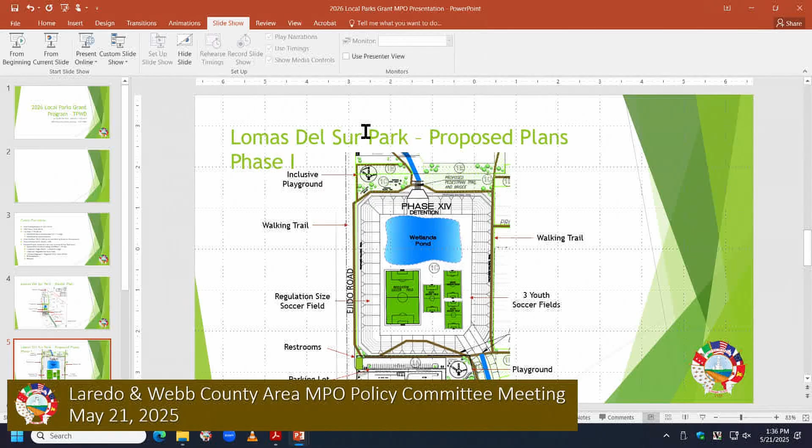This is the whole master plan of what we have now. It does go all the way from Wormser Road to Bianca Road. That's the whole master plan. Phase one does include just the center section. As you can see, there's an inclusive playground at the top, regular playground at the bottom, and 32 parking spaces at the bottom.

It wasn't included in the master plan, but it does include restrooms. Our budget does allow for restrooms.

There's a walking trail all around the pond area, and you can see the regulation soccer field and 3 youth soccer fields. And up here would be the pedestrian bridge.

If I may— yes, go ahead, sir. I'm just curious, you keep referring to phase one, how many phases are there?

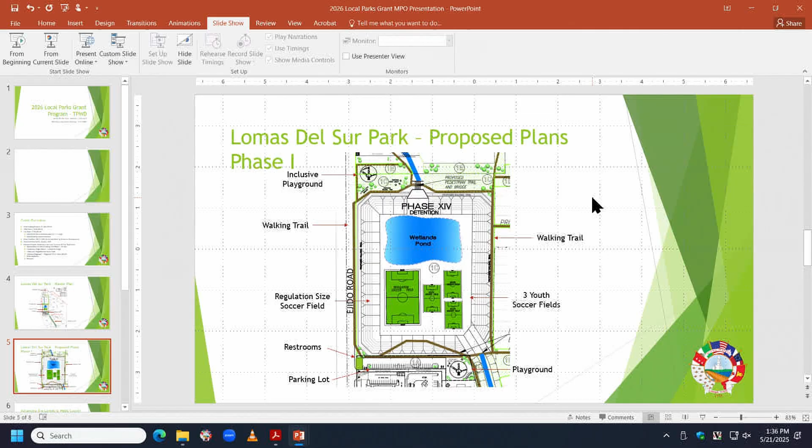So we do plan on breaking it down to 3 phases. The middle portion would be phase one. Phase two would be the top portion all the way to Wormser Road. And the third phase would be from where the parking lot is all the way down to, I want to say, Molina Middle School—I'm not sure the name of the middle school, but there's a middle school down where the trail ends.

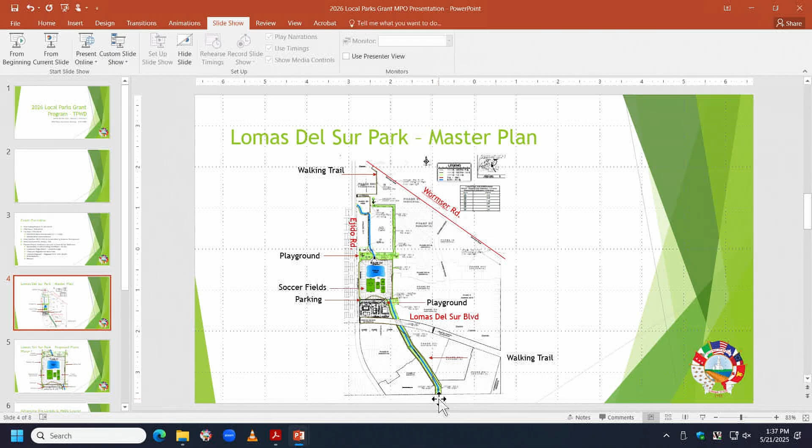So do you have, I guess, and I don't know anything about this, I know this is the city's initiative, but I was just curious what's the total cost? Is it already out there for all 3 phases?

I wouldn't have the cost for phase 2 and 3, but phase 1 did come out to a little bit under 1.5 million, which would be this area right here. Thank you. All right.

And here I just mentioned really quick how the park ties up to the MTP and the active transportation plan. It promotes active transportation, connectivity. It complements the Vision Zero initiative. It supports equitable development, and it supports the regional mobility and land use development.

And here are just the current pictures of what the current area looks like.

So, you said something about 5.5 million, is that correct? 1.5 million. No, but in your initial talking points, did you say something about 5 something? No. Okay, then I misunderstood.

The cost that we have right now is a little bit under 1.5 just for phase 1. I got that part, I don't know why, for some reason I thought you said 5 something, so I was just trying to break it up in my brain for the next phases, that's all. No, it's okay.

And like I said here, pictures of how the current area looks like. And I don't know if y'all have any other questions I can help answer.

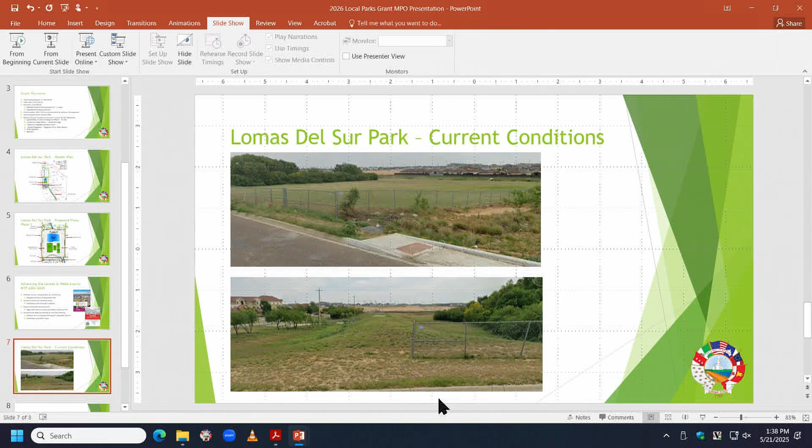Thank you so much, we appreciate it. Any other questions? Ready, Mayor? All right, thank you. I believe the motion passed already. Yeah, motion passed. Thank you.

All right, next, number 5, reports and presentation, no action required. A, status report by the Regional Mobility Authority, RMA.

Good afternoon, Mayor, members of the MPO Policy Committee. Jed Brown with you all. We have in your packet, like you find each month, each item or project that we're working on listed there. We try and provide it in advance. If y'all want to read through it and you have questions, we're always here to answer them.

2 of the bigger projects we're working on would be the Vallecillo project and the Vision Zero Safe Streets for All. Vision Zero has a meeting tomorrow with TxDOT, the RMA, and the City of Laredo to visit about that project. In continuance of it, we have an application due next month for implementation funds. We're hopeful that that particular item will actually be on the City Council agenda June 2nd.

I know that we're all trying to come up with money to fund that initiative, that project, and I was told by Assistant City Manager Ramon Chavez that he and city management will be working with council to try and identify where the money would come from to fund that portion. The RMA is willing to kick in monies, and TxDOT has projects on their list. So within a week or so, we're gonna try and figure out how we're gonna move into the implementation part. But we do need the mayor and council's help to come up with some monies.

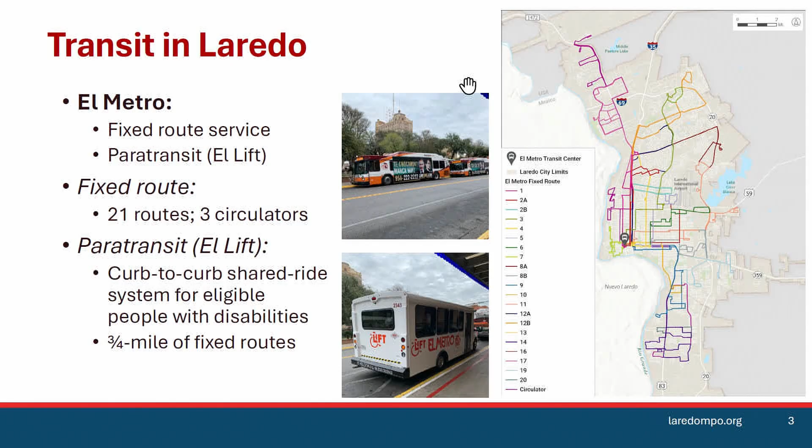Microtransit is a shared on-demand service that operates within defined zones, and that's the key—trips must start and end within a particular area. It's less capital intensive than fixed route, much more simple to change zones or be responsive to rider patterns and requests, and it can allow for increased accessibility and coverage.

Oftentimes it'll provide an improved rider experience because there's the ability to reach more destinations with less waiting time. People can get picked up and dropped off closer than with fixed route. Generally it's technology based, so it works on an app. There's also the ability to have a phone call to schedule rides, and that can be done same day—more flexibility for riders.

The vehicles used for microtransit are often a small bus or a minivan. A portion of these need to be ADA accessible. It differs from Uber or Lyft in that it's a shared service, and the trips must start and end within a particular area.

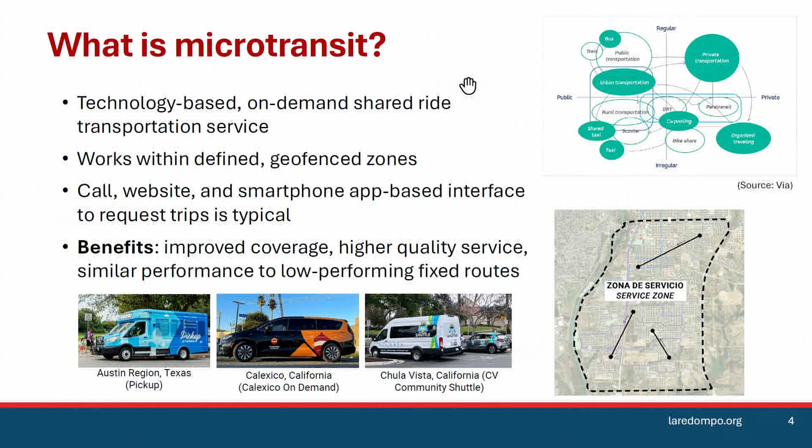One thing I'd also like to note is that we did a review of various planning efforts done in this region over the last few years, and microtransit would help achieve some of these regional goals for mobility and sustainability.

As part of our study, we looked at other agencies currently implementing microtransit. We wanted to understand lessons learned and considerations for implementing microtransit here in Laredo. We picked 7 agencies—4 located in Texas, and 3 of them are also border communities. We conducted phone interviews with these agencies to understand their challenges and lessons learned.

There's really a wide variety in the number of zones they have, the cost, and wait times. Something about these agencies as well is that a lot of them are turnkey operations, meaning there's a third party that runs their whole system. Austin and Tulsa in particular use their own vehicles, but they do have a contractor that helps with the technology side of things.

A lot of these programs started off as pilot programs, and then expanded over a series of years. Some of them started to replace poorly performing fixed routes, so there's definitely lessons and experiences that can be learned from these agencies.

For Laredo, we developed 5 zones. To do so, we looked at the lowest performing fixed routes, which are the 3 circulator routes—C1, C2, C3—as well as route 8B. All of these carry fewer than 6 passengers per hour.

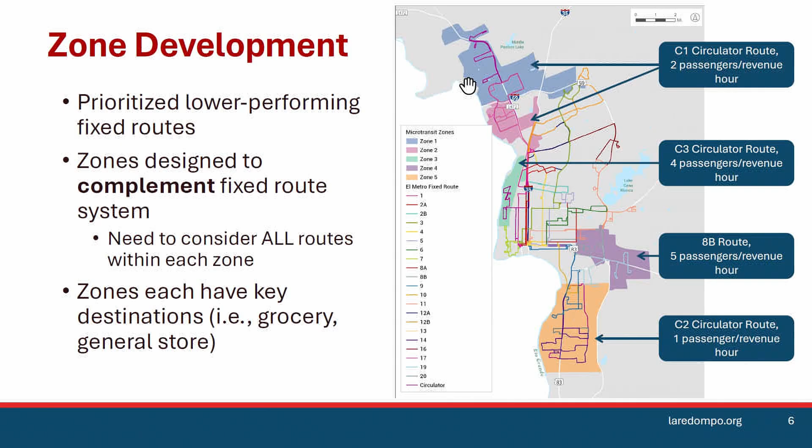Just to talk very briefly about some of these zones—Zones 1 and 2 are located in the northern part of Laredo. These have industrial land uses, which is an interesting use case for microtransit. We spoke with some folks as part of this study to understand how microtransit could help alleviate some tractor-trailer congestion.

We understand that there are drivers who drive around when they're not working to reach essential services and grocery stores, and implementing microtransit in this zone would allow for this use case. This is where the C1 circulator runs, and again, if that is eliminated, there are definitely opportunities for riders to connect into the fixed route system.

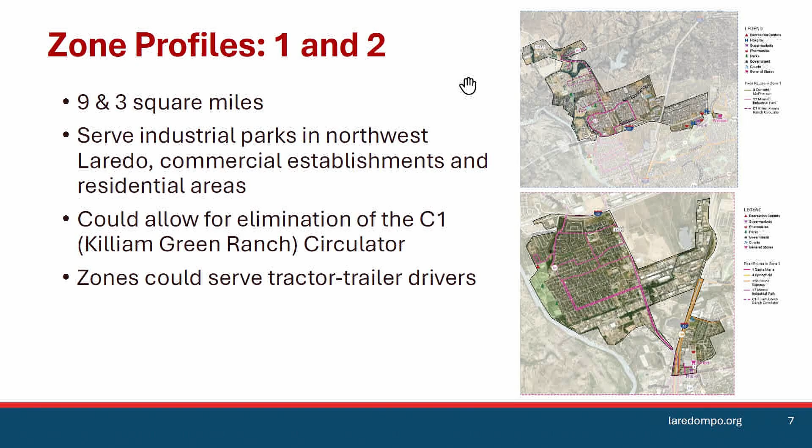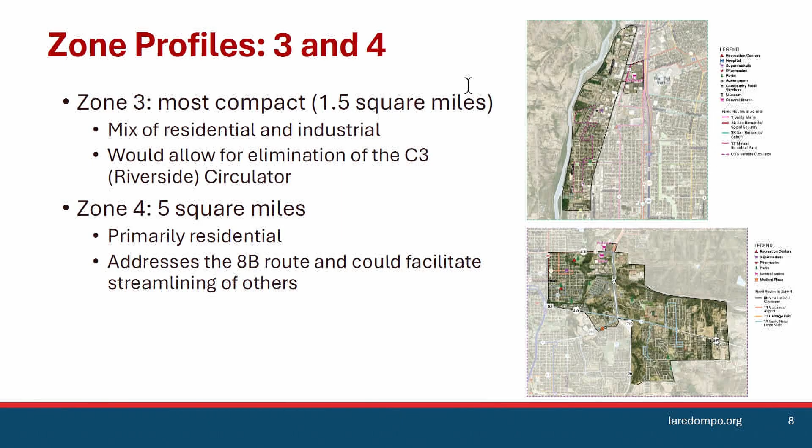Zone 3 is on the west side of Laredo, where the C3 runs. Zone 4 is on the east side, where the 8B runs. Zone 5 is in the southern portion of Laredo. This is our largest zone, and it's where the C2 South Laredo circulator is located.

There are a lot of activity centers and fixed routes already here. Through our engagement efforts, we did hear some interest in microtransit in this area, and that was one of the reasons we considered this zone. However, implementing microtransit here without further data collection or study could have detrimental impacts to the fixed route, so at this time we do not recommend implementing it over here.

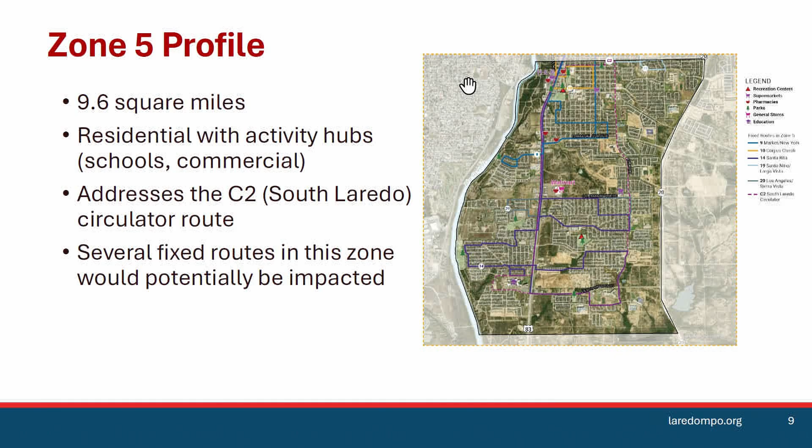For our analysis, we looked at ridership and cost. We looked at internal trips traveling within these zones and tried to figure out how many of those trips would actually be able to use the microtransit. From there, we assume that when you start off the service, ridership is going to be a little lower, and then it will increase as people get more accustomed to the service.

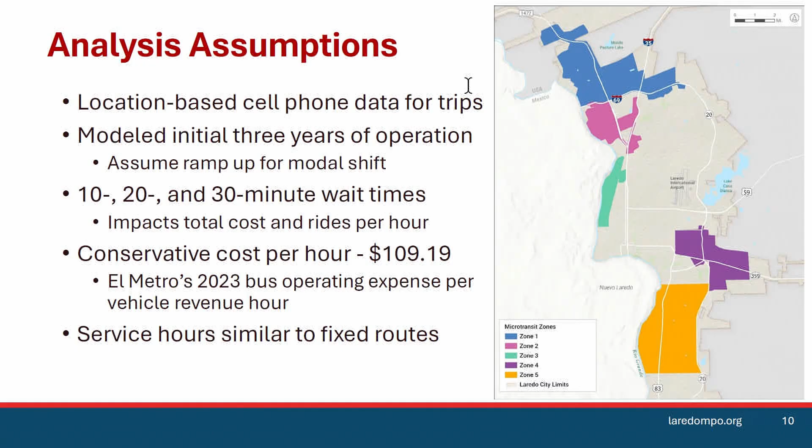We considered a variety of wait times between 10 and 30 minutes. Total ridership per year does not vary based on wait times, but the shorter the wait time, the more it's going to cost, and the fewer riders per hour you will have. The cost estimate used for this analysis is provided by El Metro: $109.19 per revenue hour. Likely microtransit will not cost that much, but that's the number we used.

As part of this study, we spoke to a number of people. We reached out to the public and El Metro riders. We had a survey published last fall, distributed by us and El Metro in person, advertised on social media, and available on the buses and at the transit center. We received 130 responses to our 14-question survey, which asked about people's interest in microtransit, where they'd like to see it, what they'd use it for, and any concerns and thoughts they might have. We also asked for general feedback on El Metro service, and the full survey results are published in the report.

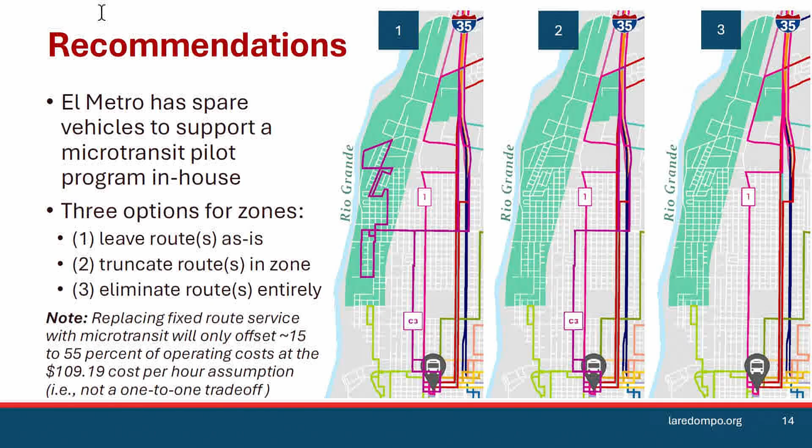A note about cost: microtransit will only offset a portion of the cost. It's not a one-to-one savings.

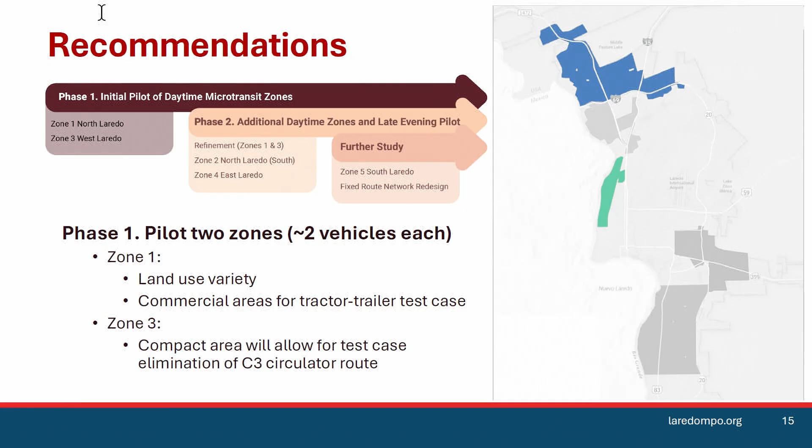Our recommendation is to do a two-phased approach. For the first phase, we recommend piloting 2 zones: Zone 1 in North Laredo and Zone 3 on the west side. Zone 1 would allow for a test case of the commercial drivers, though parking and marketing would need to be sorted out. Zone 3 is the most compact, and would be the easiest to cleanly eliminate a circulator route.

For the second phase, we would recommend looking at what's worked well in the pilot and what tweaks need to be made to those 2 zones, or what other lessons have been learned. The next 2 zones we would recommend are Zone 2, also in North Laredo, and Zone 4 in East Laredo. You could also consider piloting late evening service at this time. Finally, we would recommend further study prior to additional zones, including Zone 5, doing more data collection to understand broader impacts on the fixed route system.

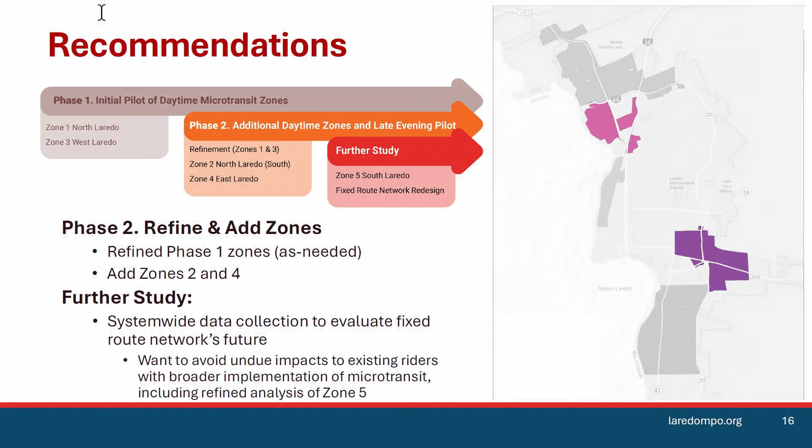Our report has a whole playbook about implementation. We talk about technology and address transfers. Hopefully riders of microtransit would be able to have a free transfer to the fixed route so those 2 systems work seamlessly. At this time, while the pilot is occurring for microtransit, we recommend keeping El Lift paratransit as is.

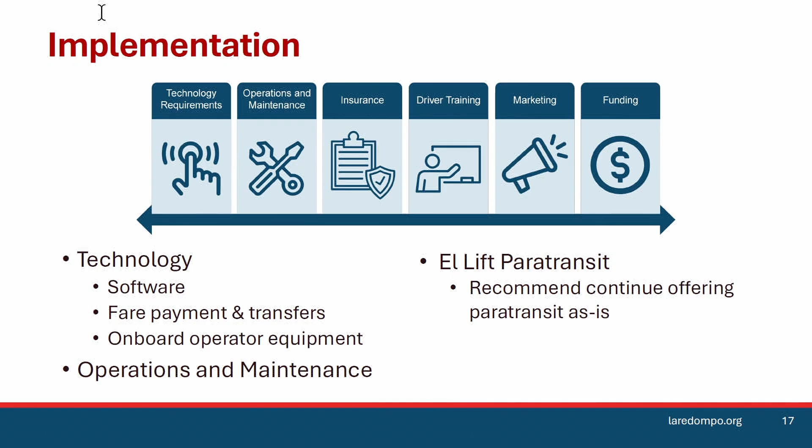One thing I'd like to highlight in terms of implementation is marketing, which will be critical for the service to succeed. There are several ways to get riders accustomed to the service: travel training, going out to actually ride the circulator route and tell people about microtransit, giving free rides, and having ambassadors to explain the service. For the trucking population, going through employers and trucking associations, and word of mouth will also be important.

In terms of funding, FTA considers microtransit a demand responsive service, so you can utilize existing funding sources. For late night service, there's the ability to contract some of that out to the private sector. For performance indicators, many are similar to fixed route, but you'd want to track shared rides. Since microtransit is a flexible mode, there are different things El Metro can do to adjust the service based on performance.

Overall, we believe microtransit would be a good addition to Laredo. It would help complement your existing fixed route and paratransit service while also creating an improved rider experience and increasing your coverage.

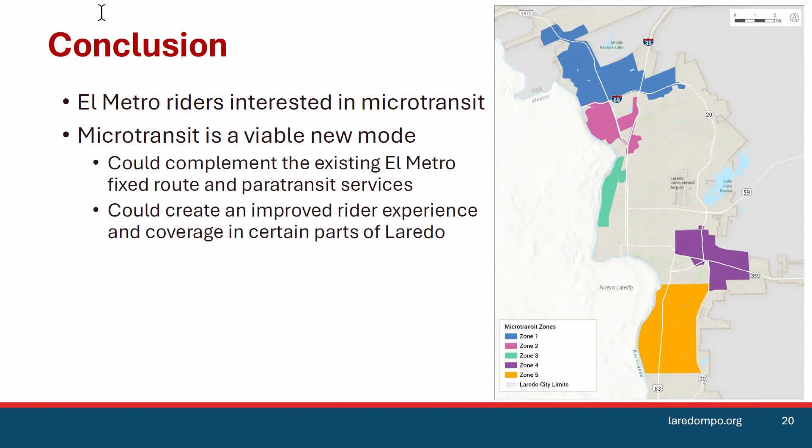Mayor: The pickup zones and drop-off zones are specific to whatever zone is being used, or do they pick them up at different sites? Presenter: Correct, within a zone you can be picked up and dropped off anywhere within that zone. To get from one zone to another, you need to transfer to the fixed route. Mayor: All right, okay, thank you.

Mayor: A couple of questions, thank you for the presentation. Do you have a percentage of how successful microtransit is in a city after the grants are over? Because I've heard there's a pretty high rate of failure after the federal grant ends. Is this a federal grant or not? Presenter: Arthur, do you want to answer that? In terms of success, I think it really depends on how you define success and what the goals of the service are.

There are definitely ways to scale back the microtransit or adjust the parameters, so I don't know if there's a single metric. Mayor: Well, success for me would be obviously lowering the cost for our consumer and them utilizing it.

Because if they're not utilizing it, it's not saving us any money, there's no reason to bring it in. That would be success to me. Want to make sure ridership is there. If it's not there, then why keep it?

And want to make sure it's a lower cost for the consumer. So in terms of fare for the consumer, we'd imagine the fare is similar to a fixed route, so it'd be about $2. The cost would be the same for microtransit versus fixed route, but microtransit can provide an improved experience because there's more flexibility, more coverage, and you can get picked up closer to where you want to go and where your origin point is.

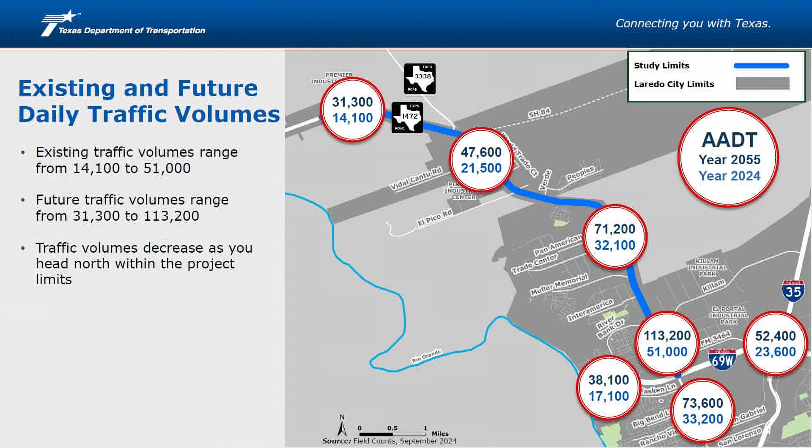Projecting those numbers forward to the year 2055, we have about 31,000 at the far north end of the project, and on the south end at I-69, we're looking at about 113,000 for the corridor. So that's a lot of traffic. And as you can see here, the projected traffic numbers is just expected to continue to grow. So it's doubling over that time period.

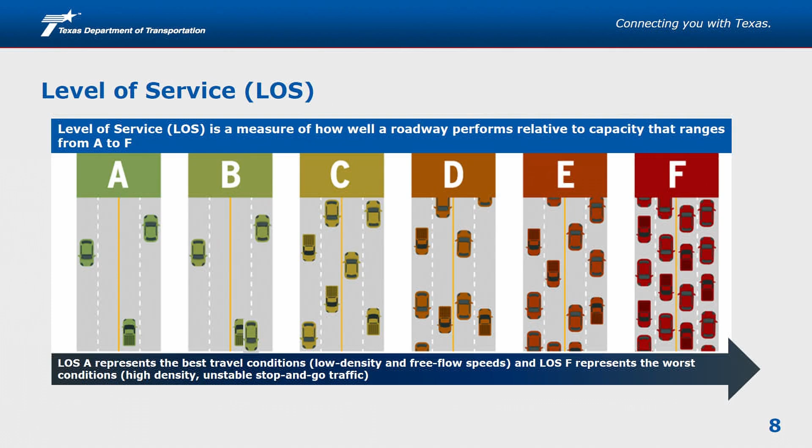So what do we do with those traffic volumes? We use those to develop the level of service. That will give us what the traffic flow is along the corridor, what the capacity needs are for the corridor. So based on an A, B, C, D, F system, very similar to a grading system, F being the worst, we have identified what the level of service is along the corridor. We also determined what the travel time was for the corridor.

If you're starting at the north end, coming all the way to I-69, for example, 2 miles north of 3338, for the existing conditions in 2024, we're looking at about 40 minutes travel time. This is in the PM period.

For the year 2035, we did an interim between 2024 and 2055, so we took an interim year of 2035. At that point, you're looking at about an hour and a half travel time. Ultimately, for 2055, you're looking at a 3-hour travel time. Of course, nobody's going to sit in traffic, but this is if nothing is done, based on existing conditions at this time.

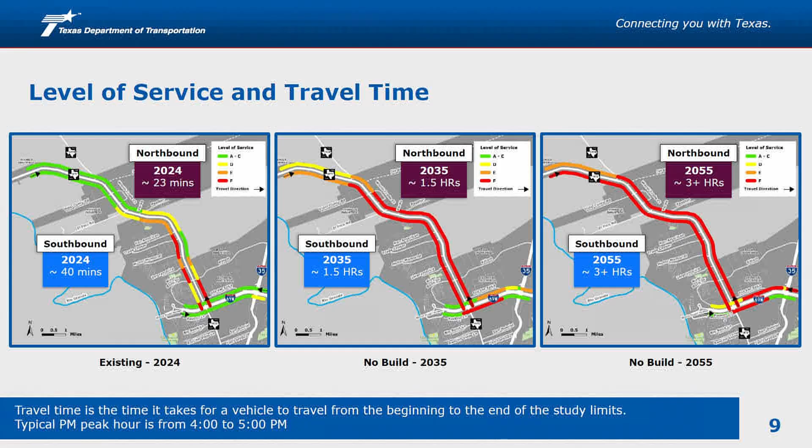So as you can see, the travel time just keeps increasing and increasing. There's definitely a congestion issue along the corridor. So once we developed all this existing conditions and traffic volumes and so forth, we went to work and developed some of the alternatives for the corridor that were presented to the public.

This was one of the preferred alternatives that we presented to the public and that the public favored, which is basically going from I-69 to Killam with 2 elevated structures and putting the access road underneath the elevated structure. By doing this, we can reduce the right-of-way impacts along that corridor, at least between 69 and Killam. Now, if you go north of Killam, you have a much wider right-of-way in that particular area.

Somewhere between 250 to 300 feet of right-of-way in that area. So with that, we were able to expand that and provide a wider section, as shown here, from Killam going all the way to 3338, with 3 lanes in each direction for the main lanes, and then 3 lanes in each direction for the frontage roads. So this was kind of the preferred alternative from the public.

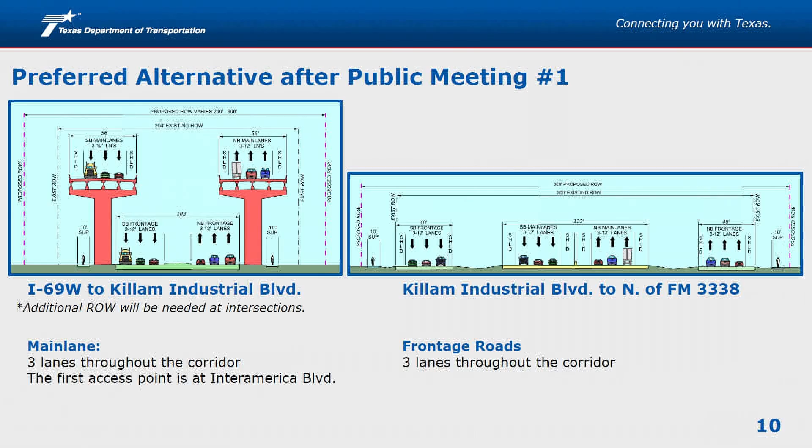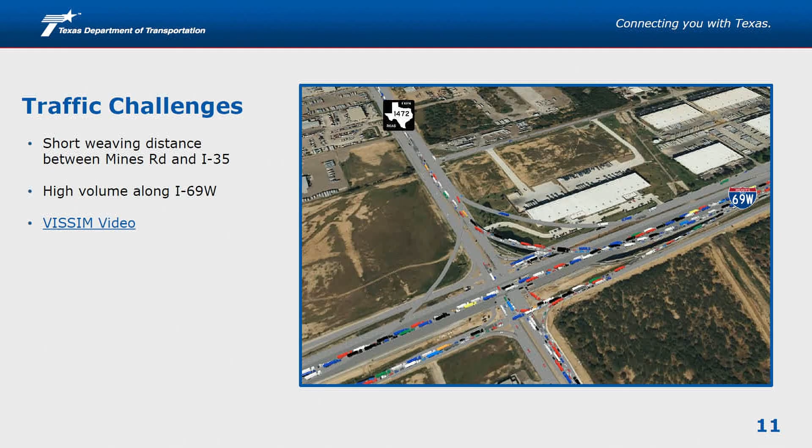By doing that, we determined that there was still a problem, not so much on 1472, but once you get to I-69, there's a traffic issue there. There's a capacity issue on I-69, and the direct connectors are so close to each other that you have a weaving issue right there. So we identified this to be a problem, and we went back to see what else could be done to alleviate the traffic there, to delay any additional widening of I-69 in that particular area.

So we started looking at the traffic patterns. Where is all this traffic coming from? Where are the trucks coming from? We started looking at what we call an OD study, an origin-destination study. And we identified that some of these trucks or users of this corridor are starting down south on I-35, making their way up north, going down to I-69, and heading up 1472.

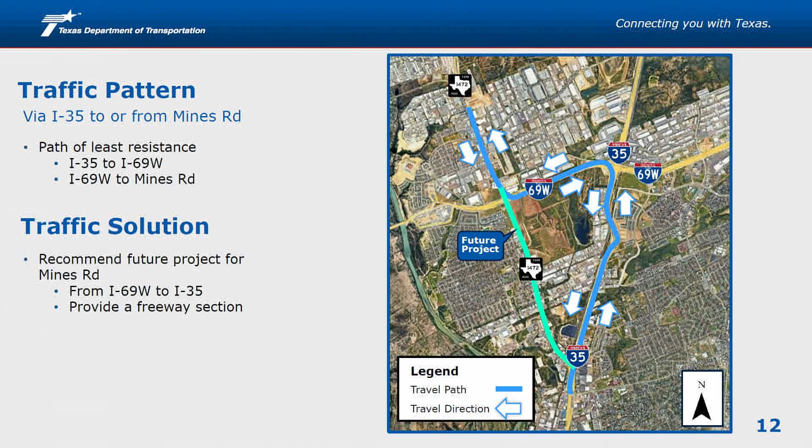So we identified what this was, and we came up with some recommendations. Of course, one of them was to improve I-69, but what else could be done? Based on that, we looked at a particular point along corridor 1472, in this case at Killam.

So based on this information, we came up with the idea and evaluated what if we extended 1472, recommending an extension of 1472 south of I-69. By doing that, we identified that 27% of that 33% would actually go up 1472 from I-35 on the south end, which reduces that by 27% and leaves 6% on the I-35 corridor, also reducing traffic congestion on I-69 between 1472 and I-35. With that traffic, 39% of it would actually be going up 1472.

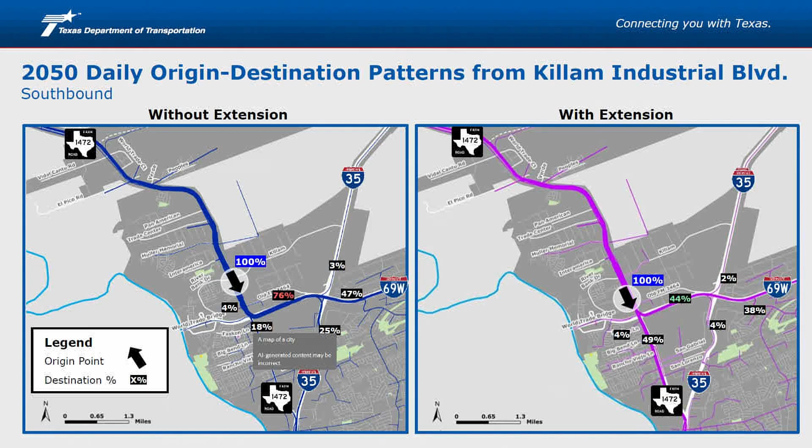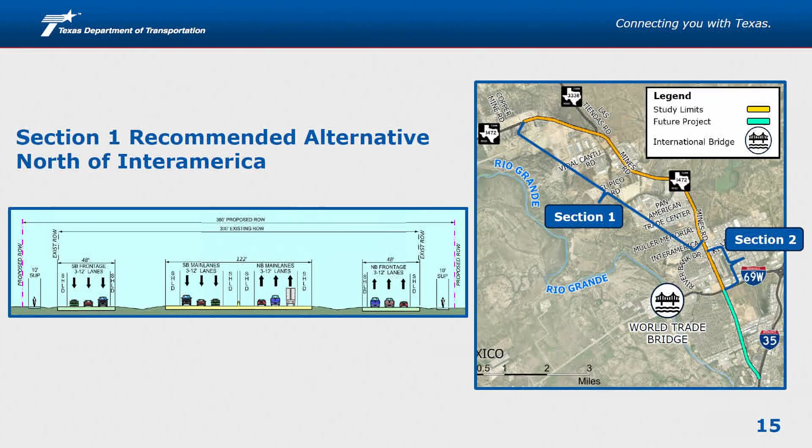For segment 2, from Killam going to I-69, this was one of the recommendations. We're looking at elevated structures again, with the elevated bridge in the middle, but this one actually shows it going across I-69. Previously I showed you 2 elevated structures, before we evaluated the need to extend this across I-69 on the south side. This is one of the alternatives we'll discuss with the district for the extension of 1472, or at least to make provisions for it in the future.

The problem is if we don't look at this now, and in the future there's a real need to do the extension, there could be a lot of throwaway at this interchange. What we're trying to do with the district is avoid throwaway cost here. So we're either going to make provisions for the extension, or possibly look at just extending this to the next intersection on the south side.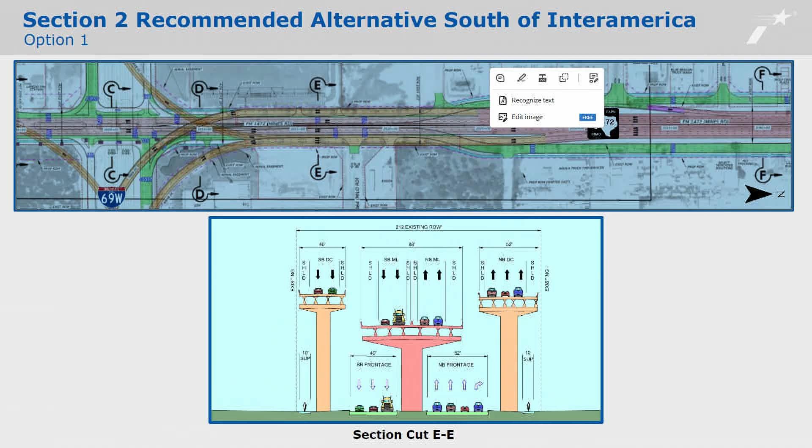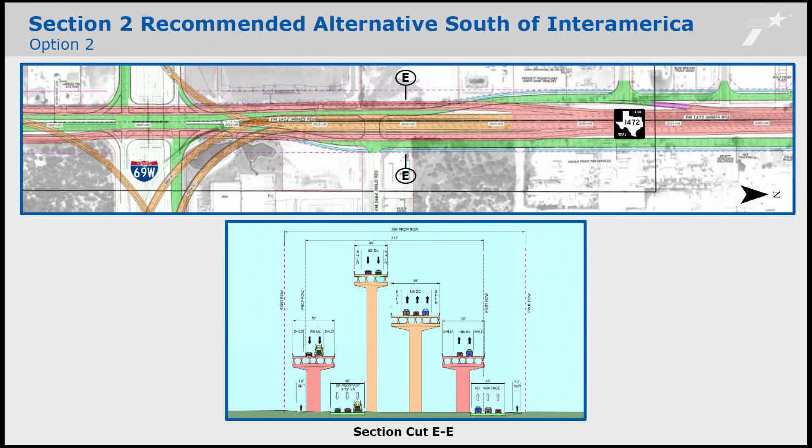Another element to these improvements along the corridor is the interchange proposed for State Highway 84, Hachar. We're looking at an interchange with direct connectors feeding into the main lanes, providing connectivity all the way to 59. These direct connectors will help facilitate traffic flow better coming from I-69, providing another option for the trucking industry to reach their destination on 1472.

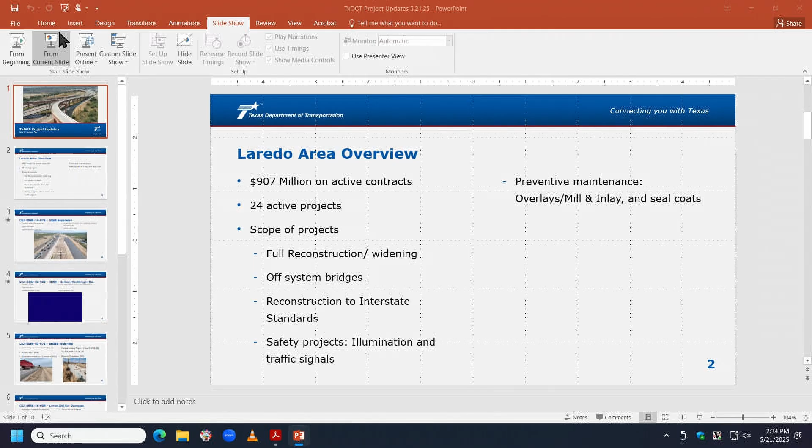Okay, good afternoon, Jose Vargas. I'm going to present the status of the active construction projects we have here in the Laredo office, starting with a brief overview. We are running about $907 million on active projects, about 24 of them. The scope ranges from full reconstruction, off-system bridges, reconstruction to interstate standards, safety and illumination projects, and preventive maintenance contracts such as overlays, mill and inlays, and seal coats.

Let me see if it works. I want to do something different.

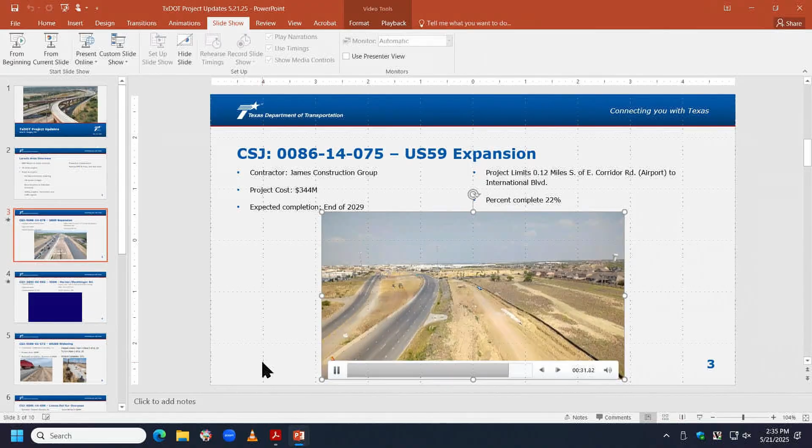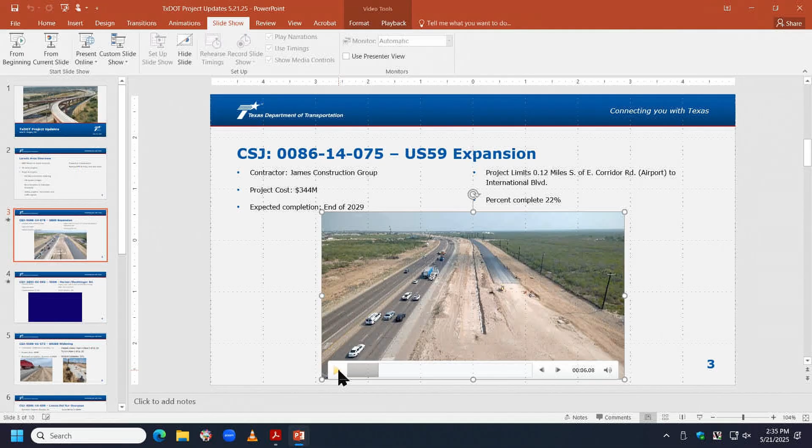This is drone footage for the US 59 project. I'll run the video as I provide the status. The investment for this project is $344 million, awarded to James Construction Group. We're a little over 22% complete. As you can see, we're starting to put some hot mix in preparation to start concrete pavement on the northbound frontage road. They continue prepping subgrade and placing base. Earlier in the video, there's already some retaining walls being constructed in preparation for the future ramps and the intersection overpasses.

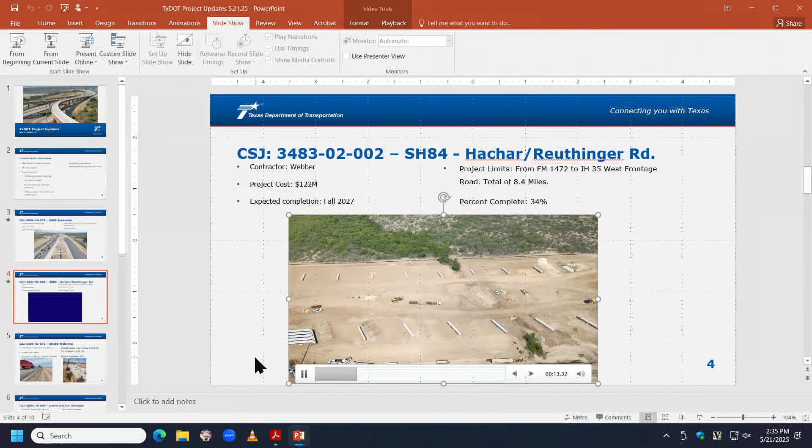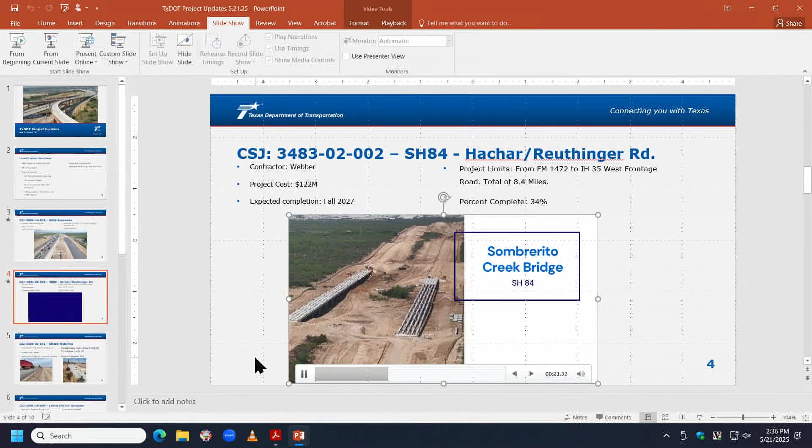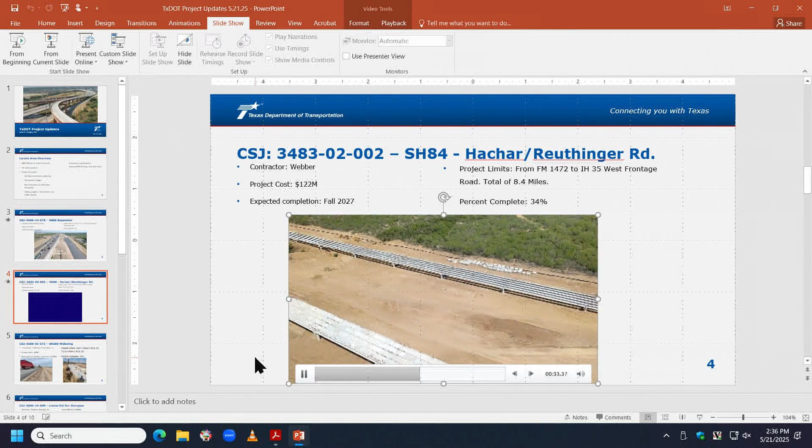Hachar, again I have a video for you all. Investment is $122 million, and we're about 34% complete on that project. It's roughly 8 miles, with expected completion in fall 2027. This one's a bit longer - we concentrated on the three bridges: Sombrerito, Cuervo, and an unnamed tributary. Bridge work continues, placing beam and deck panels, and last week we started placing concrete for the final riding surface at one of the bridges.

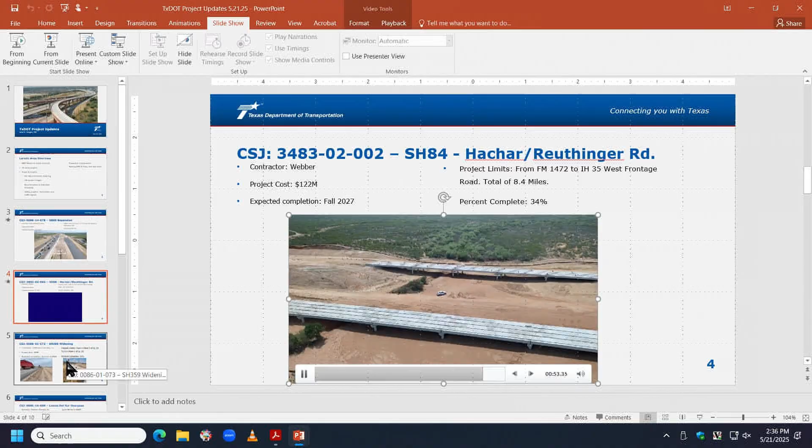359 widening - we are about 55% complete, expected completion summer of 2026. We continue working on extending drainage structures, and we're hauling base again in preparation to reconstruct the other side of the highway. Total investment for this project was $50 million.

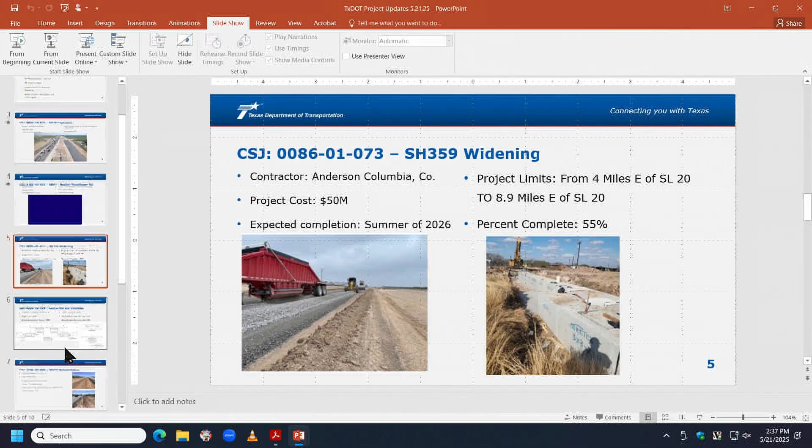Lomas del Sur, we have an update here. We have a confirmed groundbreaking ceremony - invitations will be sent by our PIO, Raul Leal. The date for the groundbreaking is June 18, and around that week we also expect to start work there. Again, the investment for this project is $50 million, and it runs from Lomas del Sur all the way to SH359. It's pretty much the concrete barrier in the middle, which is why the limits are that long.

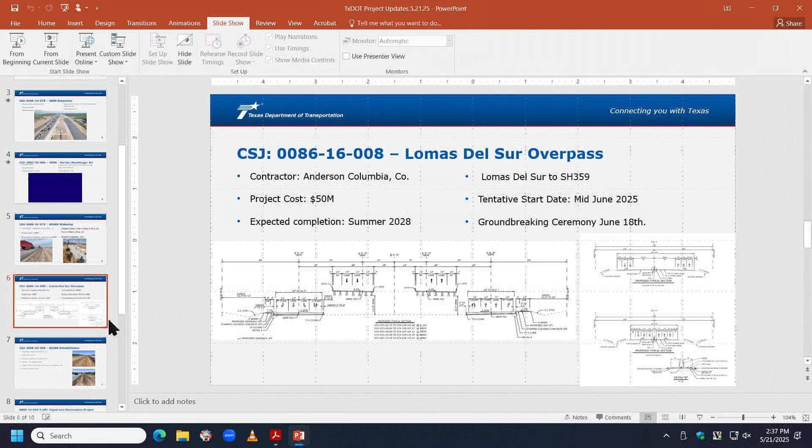SH255 rehabilitation - currently the contractor is working on the future passing lanes, and after that we'll come back and retreat the entire surface and start placing new hot mix. Right now we're at 11% complete, and it's about 6 miles starting from IH 35 going towards the west side.

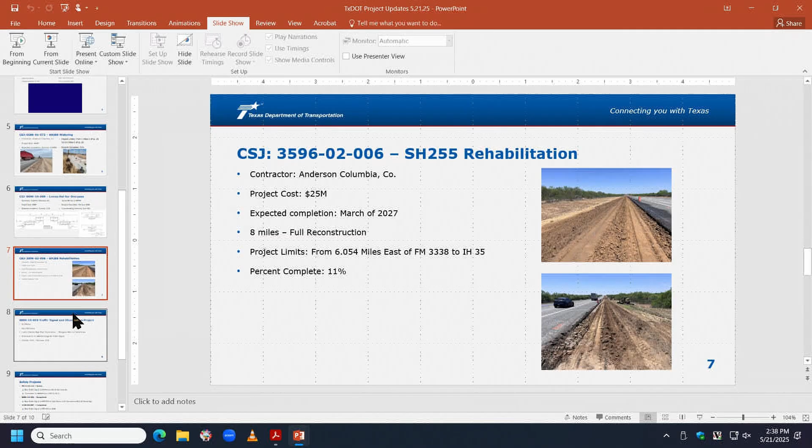More on safety projects - this one is still active: a new traffic signal at McPherson and Alta Vista Drive. We're also adding illumination at SH359 from US 83 to the Loop 20 intersection. We completed the new traffic signal at 1472 at Vidal Cantu, alongside the one at International Boulevard and Woodridge. We also completed installation of the new traffic signal at 1472 and 3338, and completed the cable barrier installation from Cielito Lindo to Espejo Molina in South Laredo at US 83 South.

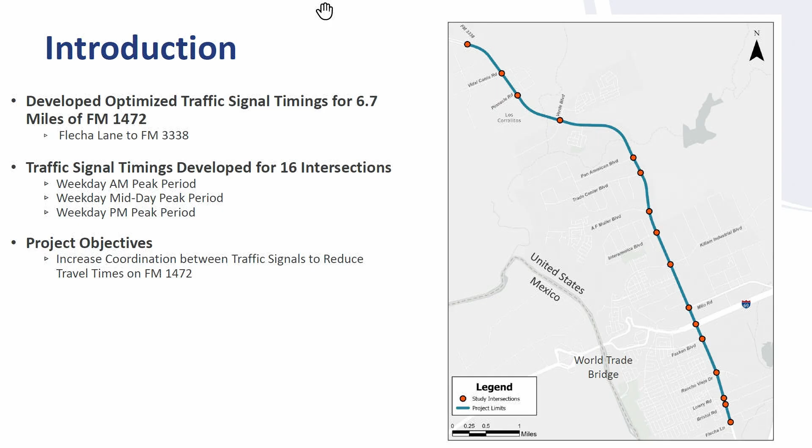We collected traffic data throughout the corridor, developed our traffic volumes, and calibrated and modeled our timings in order to meet those locations. The objective was to increase the amount of coordination between the traffic signals and reduce travel times on FM 1472.

Mayor, can I ask him a question? Go ahead. Can you go back real quick? Yes, the weekday AM peak period, what times are those? I'm going to show that on the slide.

We did traffic data collection, 24-hour counts. You can see that on the graph on the right side of the slide, showing how traffic builds up during the day. The AM peak is 8:15 to 9:15, then it drops off slightly, not a lot. The midday peak is about 1:30 to 2:30, and the PM peak is 5:30 to 6:30.

So we obtained 24-hour counts and did turning movement counts at every intersection along the corridor. We looked at the existing traffic signal timings, which we obtained from the City of Laredo, and also looked at some origin destination data. We performed field observations, looking at existing geometry and intersection operations, to make sure our models were an accurate representation of what is actually happening on the corridor.

We also performed some travel time runs, and there's a synopsis of that in the table. A travel time run is from one end of the corridor to the other, and it should be in the 7 to 8 minute range with no congestion.

If you were traveling about the speed limit along the road, the speed limit actually drops as you go from north to south, and it's variable throughout the corridor. But you're seeing, in the AM peak, travel times of 10 to 13 minutes, and then in the PM peak, 12 to 29 minutes, which kind of matches what Roger was showing earlier.

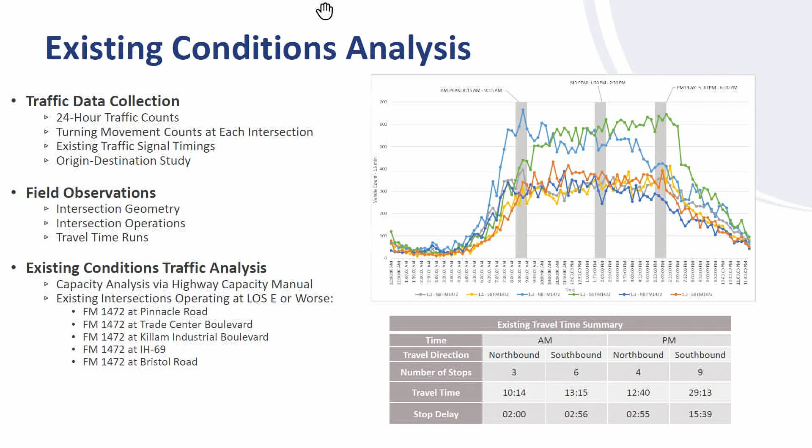So there's a lot of congestion, a lot of stop delay where you can see a lot of stop and go traffic along the corridor, north and southbound. We also performed capacity analysis based on the highway capacity manual, and noted that there's a lot of intersections operating at a level of service E and F.

In developing the traffic signal timings, the first step was to look at grouping these intersections along the corridor, so we came up with 3 groups. Group 1 is from Verde Boulevard to FM 3338. As mentioned in the previous presentation, the intersections at Vidal Cantu and 3338 were just opened.

These intersections kind of sit off, with a pretty good distance between Pan American Boulevard and Verde Boulevard, so it made sense as a natural break to have these intersections operate as a group by themselves. The most congested piece of the corridor is between Pan American Boulevard and the I-69 interchange.

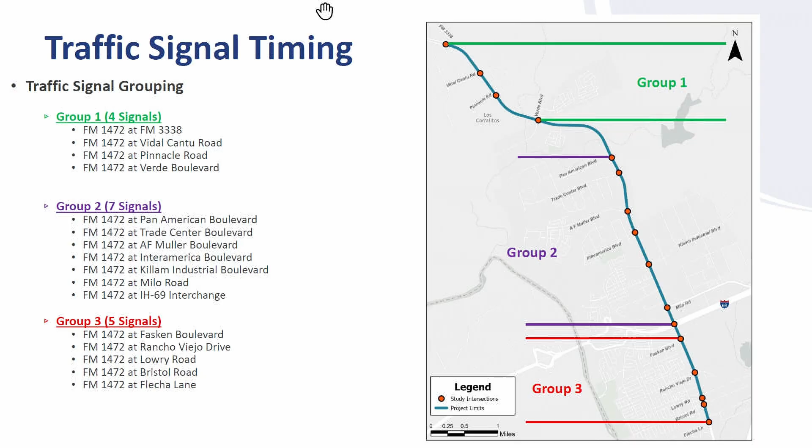So we decided to group those intersections together because they're pretty closely spaced and had very similar cycle length needs. Group 3 is south of I-69 and includes 5 signals. The traffic really drops down south of I-69 under the existing conditions.

So we were able to come up with common cycle lengths for each of the groups. A cycle length is if you run all of the various phases of the intersection one time through - that's the cycle length. In order to coordinate the traffic signals, we need to maintain the same cycle length at each intersection within each group.

Signal 2 group in the middle has the highest cycle lengths, 160 to 180 seconds, driven by the large amount of truck traffic along this corridor. It's extremely heavy truck volumes and they take a long time to get going and clear the intersection. That's one of the reasons for the really long cycle lengths. Then in group 3, traffic volumes really drop and you don't have as much truck traffic, so we were able to reduce that down to 100 seconds and make those a little more responsive.

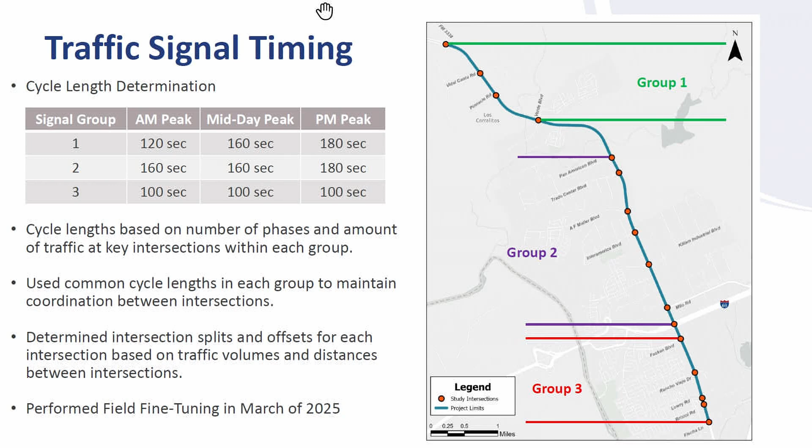So like I said, we use common cycle lengths at each intersection within the group. Once we did that, we determined the intersection splits and offsets, and made sure all the yellow and all-red times were good, all the walk and pedestrian clearance times were okay. We developed those, provided them to the city of Laredo, and they implemented them in the field. Just a couple months ago, back in March, we had crews down performing in-field fine-tuning, driving up and down the corridor, making sure everything was working correctly and making minor adjustments as needed throughout the corridor.

Yeah, I do have a question. Those cycle lengths are adjusted manually, or is there some automation to it?

There's some automation to it. We give the intersection some parameters - we tell it that the total cycle length needs to be, say, 180 seconds. But usually what happens is if there's not a demand on the side street, it'll drop that off and give that time back to the major. So we designated the north and southbound on FM 1472 as the coordinated movements. Any extra time where phases gap out because there's no traffic is given back to those movements. All right, okay, thank you.

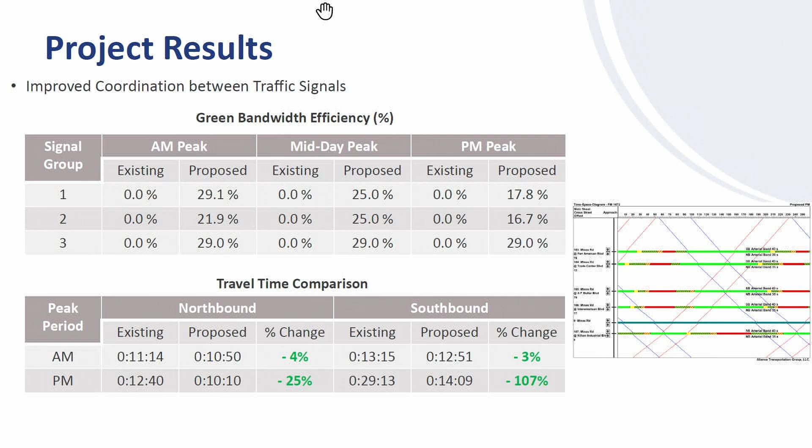So with that, I'll open up to any other questions anyone has. All right, any other questions? Go ahead, Mayor, if I may, so Jack...

I guess you guys were looking at it just strictly from an operations perspective, right - signal timing and stuff. So are there any opportunities to utilize existing configurations at some of these intersections, possibly dual lefts or things like that, that may help get more of that queue out away from the intersections? One of the things I've noticed, and I think Rafael has noticed as well, is some of our left turning bays may need to be extended just to allow or not block that inside through lane. So do we have an idea how much that would improve the operation?

We didn't specifically look at that kind of thing. Our charge was more like come up with a timing plan that we can implement in the field with the current configuration. We are working on a final report for this, so we can look at those kinds of things - maybe change this from a through lane to a through-left lane in order to help get some extra capacity for left turns and things like that. But we didn't specifically look at that.